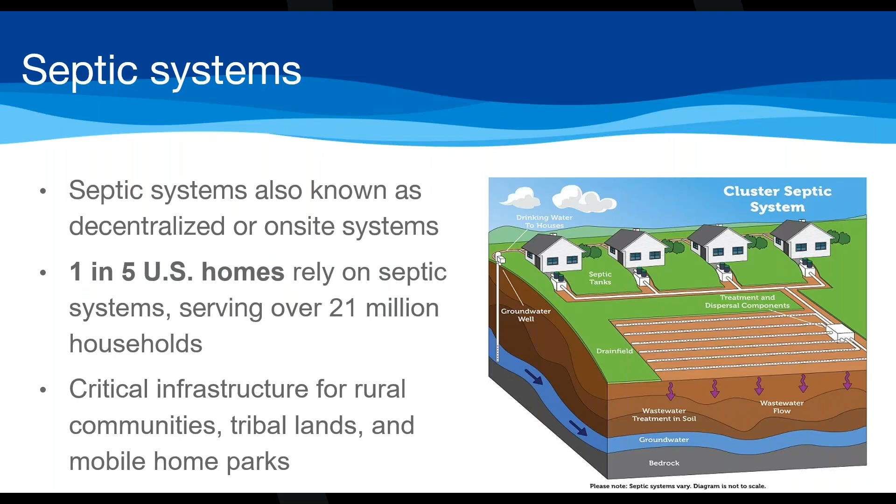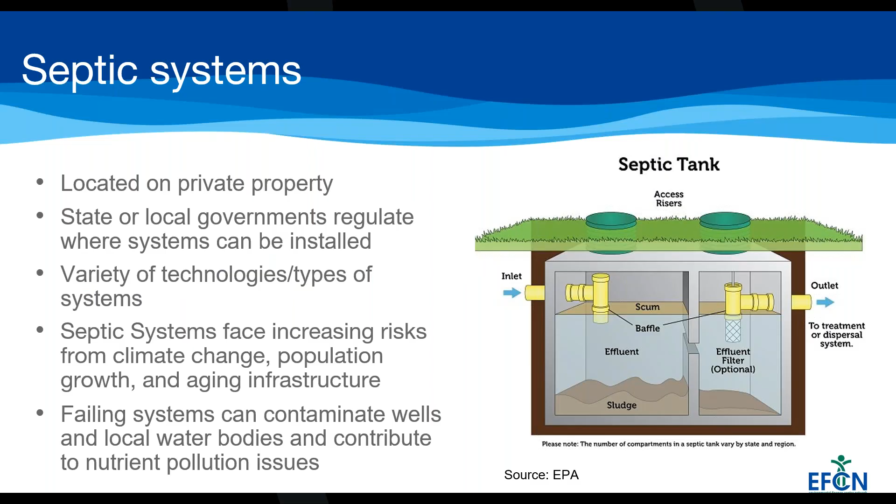I want to stress that septic systems are facing increasing risk from climate change, population growth, and aging infrastructure. And as with any wastewater treatment system, failing systems can contaminate wells, local water bodies, and contribute to nutrient pollution issues, which can impact our ecological environment.

So let's understand how a septic system works. Water from the household goes into a septic tank, using a two-stage process. The primary treatment takes place in the septic tank, where solids settle down and bacteria begin breaking down the waste. Then the water moves to the drain field, where secondary treatment takes place as soil microbes complete purification and effluent slowly percolates through it. When a septic system is functioning properly, it can treat wastewater before it reaches the groundwater.

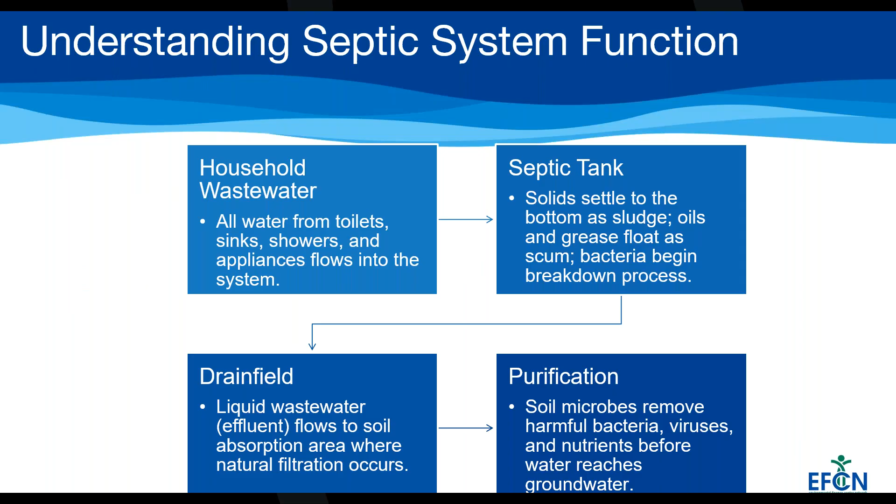Again, just a cross section of how the water goes from house to the drain field. It goes into the septic tank where the solids settle, and then it is dispersed into the drain field where the soil, usually at a depth of 2 to 4 feet, is required for the septic system to work properly. Soil is a natural biological and chemical filter with aerobic properties which can treat this wastewater, and it is essential for treating this wastewater before it goes into the groundwater.

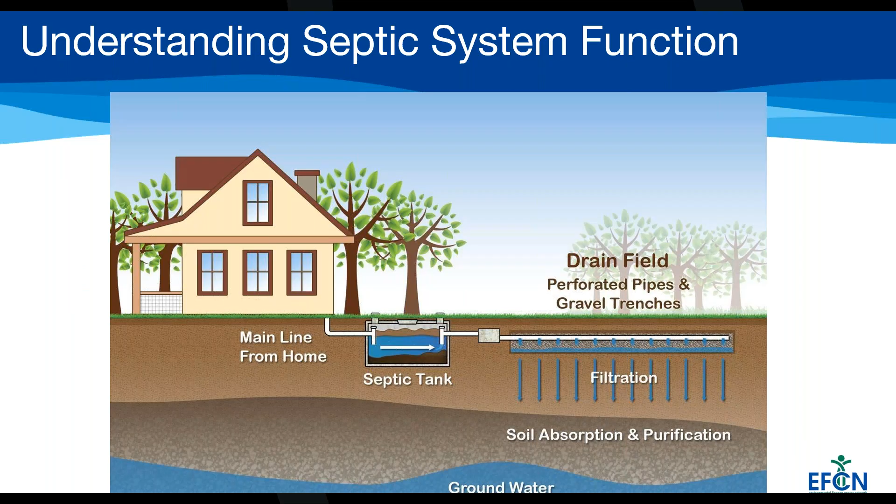For that, we need unsaturated soil, which is essential for wastewater treatment. If soil becomes saturated for some reason, it can reduce its treatment potential and can contaminate drinking water.

So what are some common septic system configurations? The most common are single family systems, which serve individual homes. These are conventional gravity systems with a tank and a drain field, or aerobic units, and sometimes they are used as mound systems where there are high water tables.

Then there are community systems, which is shared infrastructure for multiple homes. It works in a similar mechanism, but sometimes it is beneficial for economies of scale for maintenance, because the cost is shared among different households.

And then there are mobile home parks, which are mostly in lower income neighborhoods and communities, and they also utilize these systems. They have higher maintenance requirements because they have more water load, and these are often aging infrastructure with limited oversight and low cost to pay for it.

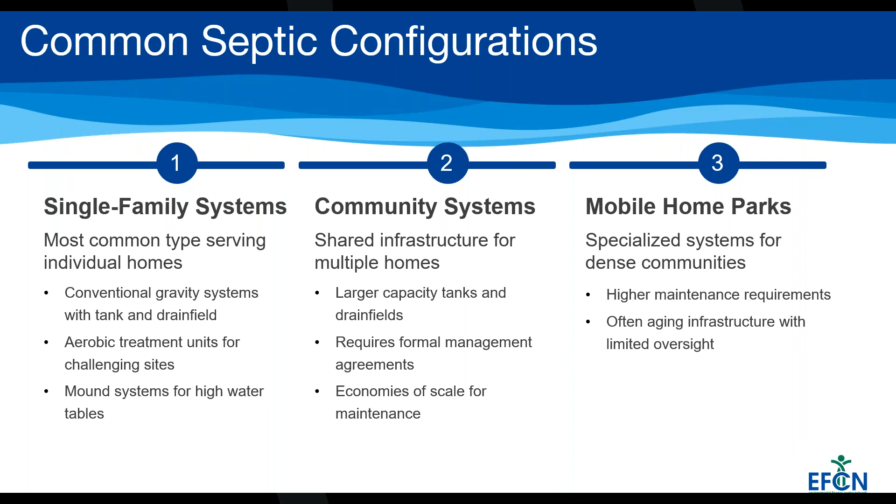Some essential maintenance requirements for septic systems: you need regular inspections, recommended every 3 years. Look for signs of failure like wet spots and odor, and monitor your sludge and scum layers in your septic tank. Pumping is really important too.

Every 3 to 5 years, depending on household size and load, you have to have your septic tank pumped, keep a schedule, and keep records of it. You also need certain daily practices to avoid flushing non-biodegradable items and keep chemicals out of the drains.

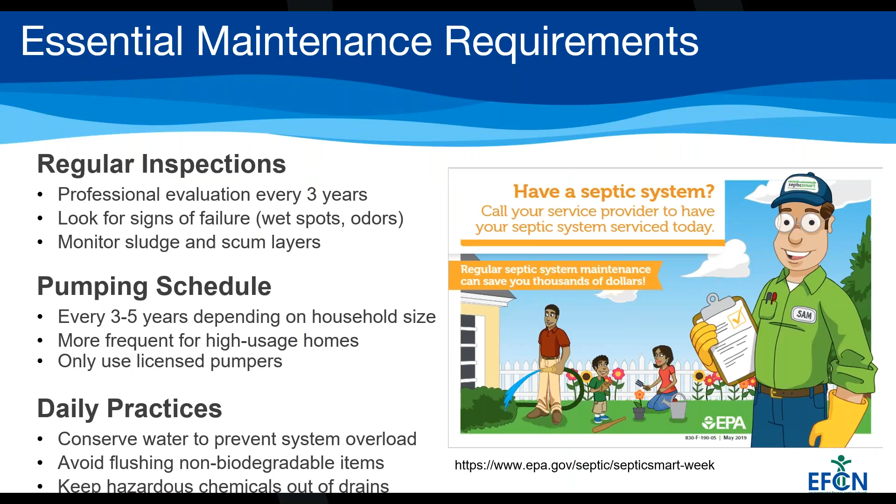This is an image from Septic Smart Week, which EPA is celebrating from 15 to 19 September 2025. There are a lot of resources on this website from EPA which you can share within your communities or read about, like not parking on a drain field or keeping trees away from septic tanks, because roots might clog your septic tank. Treat your water properly before it meets the groundwater, and keep your drinking water wells clean.

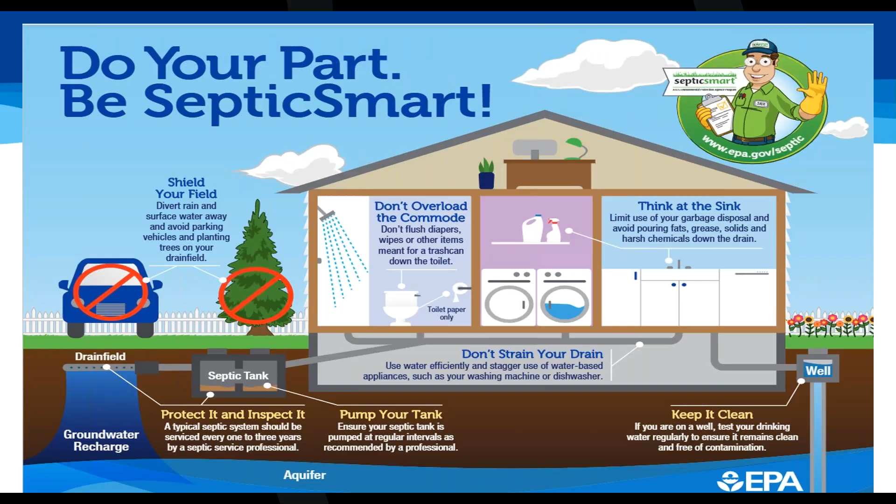Some challenges I want to mention about mobile home parks: they have higher density pressures. Mobile home parks typically place more homes per acre, so they have higher density and higher water load. Sometimes there is divided responsibility and confusion about who is going to maintain the wastewater or septic systems—either the park owner or the community itself—and they also face limited resources since they are in low income neighborhoods.

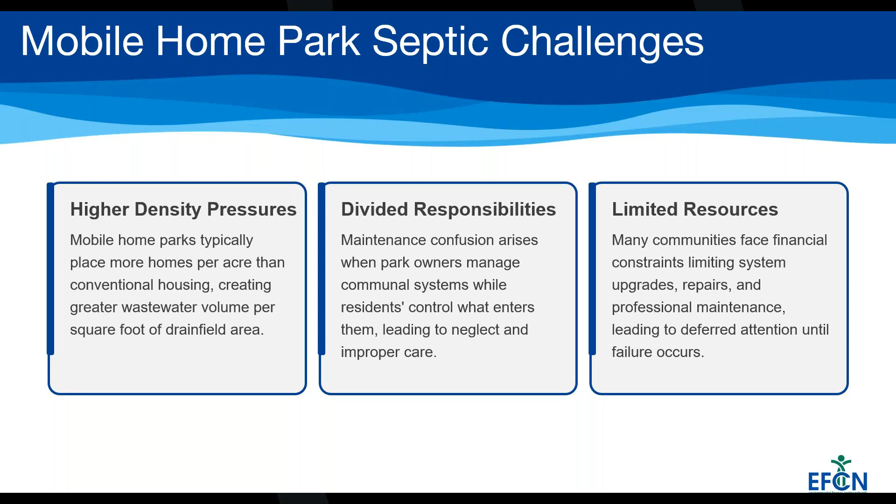Some common failure mechanisms they have: reduced retention times, which lead to insufficient treatment capacity, and hydraulic overload, for example in mobile home parks where a lot of households share the same system. Sometimes chemical disruptions can occur, and the drain field can clog. These could be due to human factors like poor maintenance and parking on septic fields.

Sometimes there are structural issues where the system is really old and not able to treat water well. And then sometimes there are geological factors—we'll talk about that in detail. It could be due to climate or seasonal variability in the water table, and low soil permeability, which can increase these issues as well.

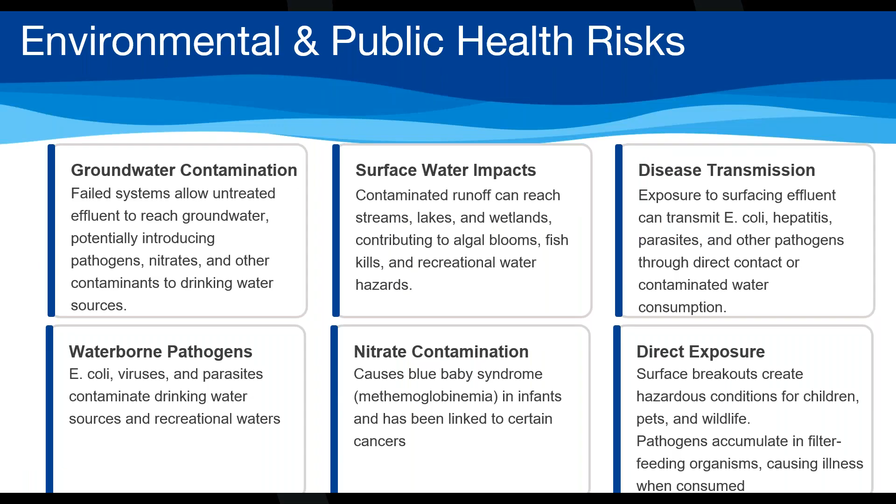Groundwater contamination can also lead to waterborne pathogens. It can also impact your surface water if it directly runs off into it, increasing nitrate contamination and disease transmission. A lot of research has been done around communities which use septic systems, and E. coli has been found in those communities' drinking water resources. Direct exposure is hazardous as well because of these breakouts.

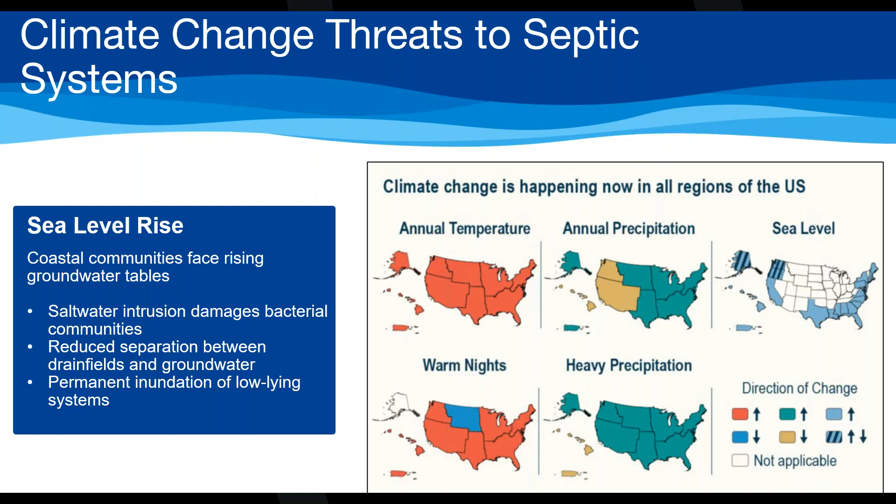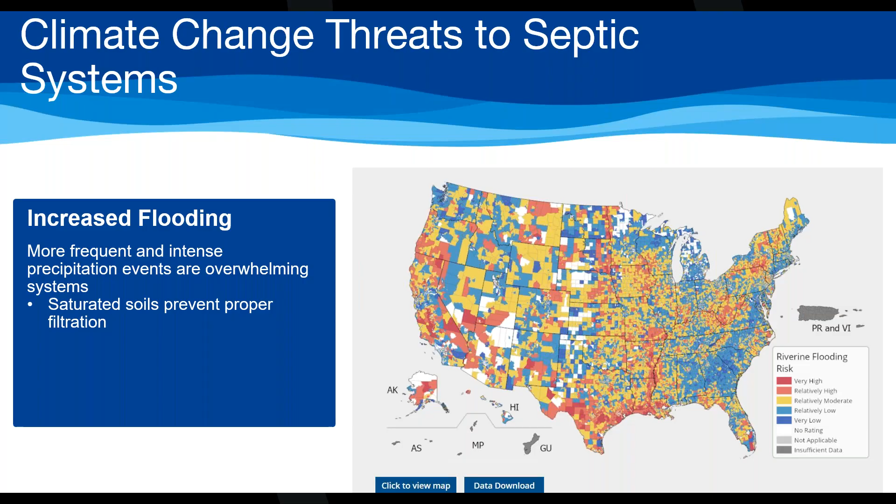Increased precipitation and sea level rise lead to rising water tables, elevating groundwater levels and reducing the essential unsaturated soil. The soil gets saturated, reducing its treatment capacity. Extended droughts can also shrink the soil and create cracks, allowing preferential flow that lets effluent bypass the treatment zone. Unsaturated soil is really important because it acts as a biochemical filter containing cells that treat the water. As vertical separation between groundwater and the drain field decreases, it reduces the capacity to treat the water as well.

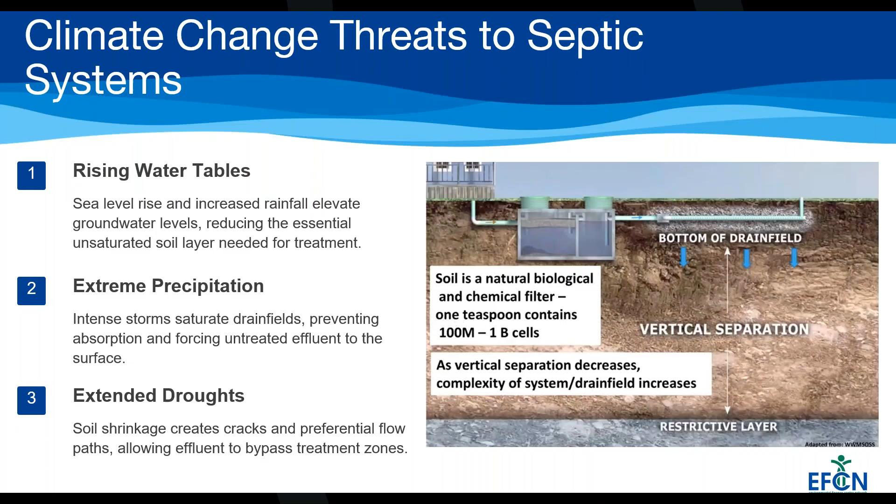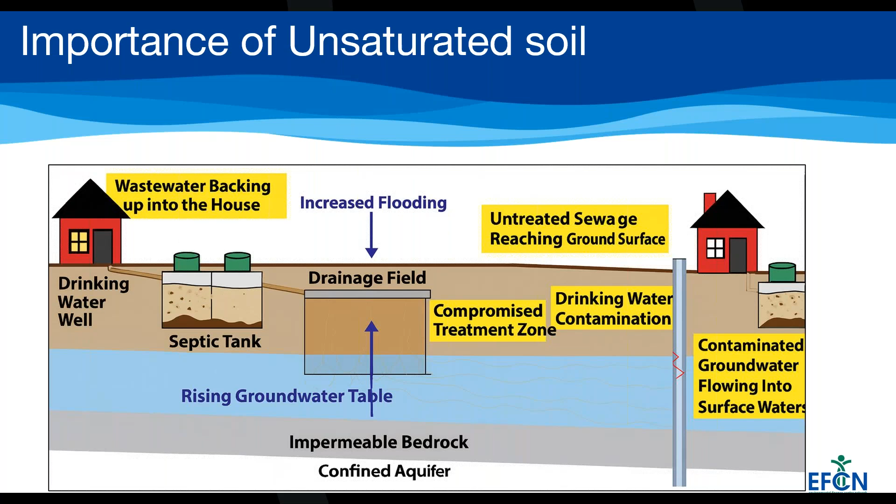Just a graphic to show how it is working and how it is impacting the septic system capacity. Water goes to the septic tank. We all know that if there's increased flooding, the soil gets saturated, and there's also an impact of rising groundwater table if the community is in a sea level rise zone. So it can reduce treatment capacity significantly, and system saturation can lead to permanent failure.

A lot of areas like Chesapeake Bay, a critical area which is considered as 1,000 feet of tidal waters, is a critical zone. Also, areas on the lakes and around the rivers are also considered critical areas. These areas face the same issues, which is increase in tidal flooding or flooding, which can increase the soil saturation and reduce the treatment capacity of the system.

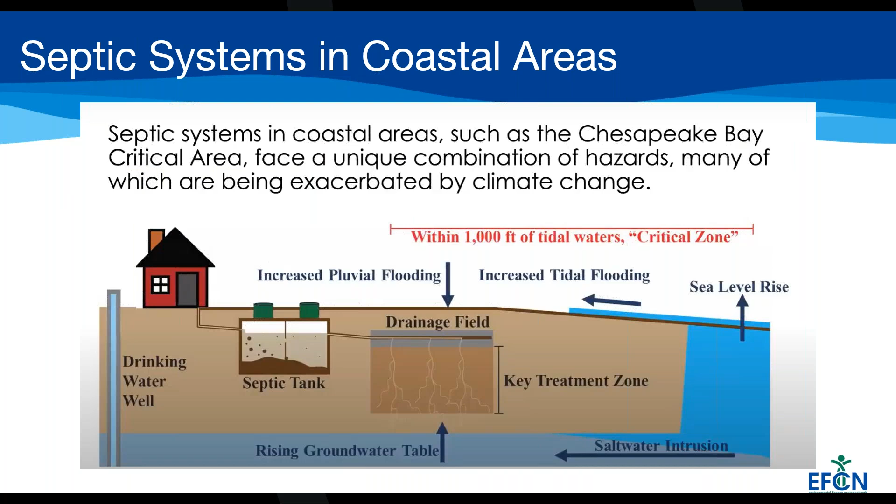We usually think that 3 to 5 feet, or 2 to 5 feet, of depth is enough for the drain field to treat the wastewater coming in from the septic tank. But a lot of counties, a lot of communities, local governments around the US are restricting it so that it should be more than 3 feet, because of the sea level rise that is happening around, or increasing water tables happening around the US.

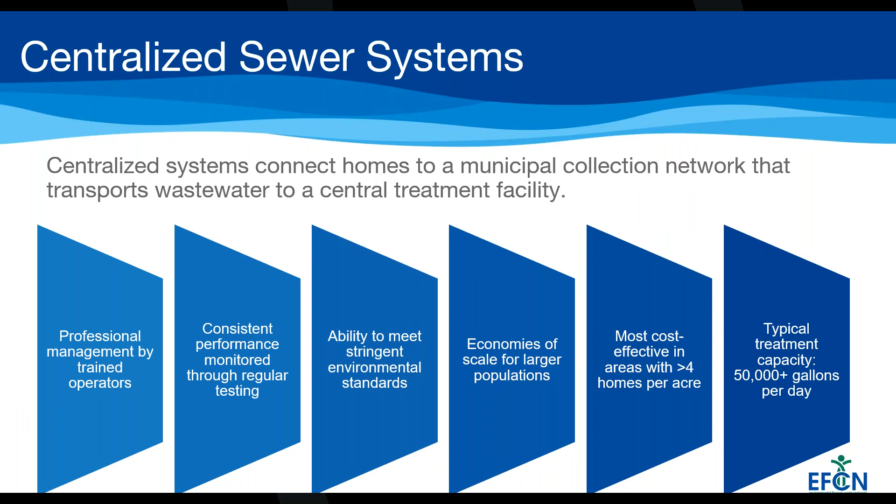These are modern treatment plants which can achieve removal rates of almost 95% for BOD and pathogens, with advanced nutrient removal capabilities as well.

Some advantages of these centralized sewer systems: they eliminate individual maintenance responsibilities, improve environmental protection with advanced treatment, and can probably increase property values by 5 to 10% on average. They provide long-term stability through shared infrastructure and support future community growth and development. Of course, it should not be in a flood-prone or sea level rise zone.

Some challenges: it is usually capital intensive, requiring a higher cost per connection, which can run from $3,000 to $10,000 or sometimes upwards of that.

There's usually ongoing monthly fees associated with each household as well, which can be from $30 to sometimes $100 if it's a small community with a low number of customers.

It requires extensive construction, which can last from 6 to 18 months, and requires operation and management municipal capacity. Installation cost can increase with distance from the existing infrastructure, so it depends on how far away you are from an existing system. Otherwise, you can think about the alternatives that we shared.

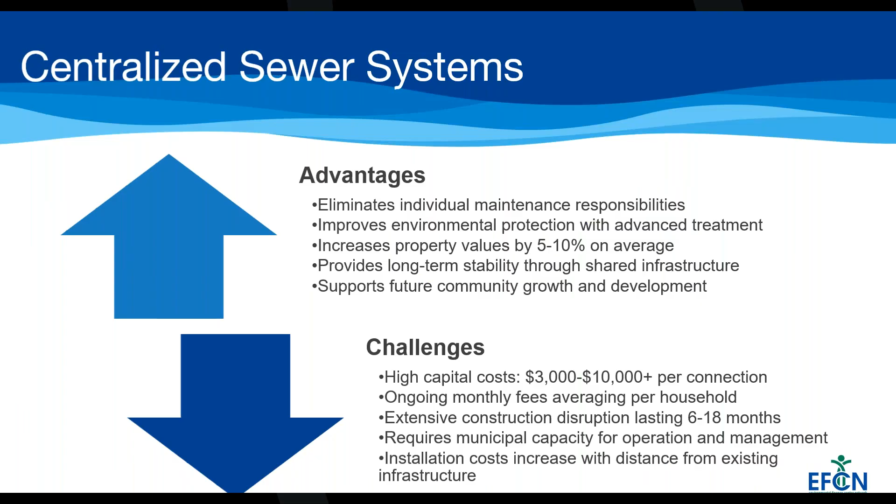So what are some issues that regulators, communities, or counties face in septic to sewer transition? These are around funding application hurdles, requiring extensive preliminary design for NEPA compliance, and land value and easement costs can increase the project expenses.

Sometimes there is underground infrastructure and we have to coordinate with the utilities, which can complicate the installation and increase the timelines. Sometimes there are also material procurement issues, and restrictions on roads and right of way can hinder easement acquisition, which can again lead to increased timelines for construction.

Sometimes residents are reluctant to grant easement, which can lead to redesign of the project alignment where the pipeline is going to go through, and which can increase the project cost as well.

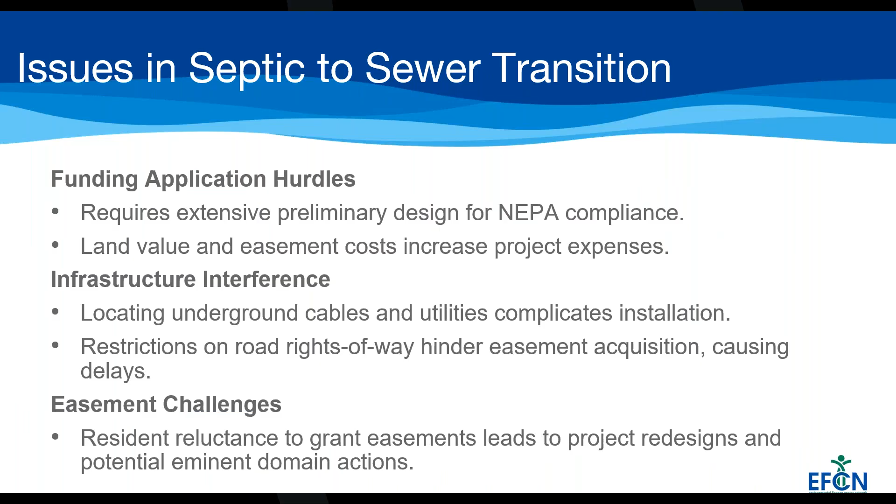Now let's talk about upgrading existing systems. We talked about connecting to the sewer, but if it's not feasible to connect to an existing sewer or nearby treatment facility, you can upgrade your on-site system, which is confined usually to a single property. So you have to bear the cost of that, but it can still be vulnerable to climate impact, so you have to take care of a lot of those factors.

The soil ultimately provides the treatment capacity, so it is still vulnerable to sea level rise. If you upgrade it, it might be less vulnerable than when it was installed, but it'll still be vulnerable to sea level rise as well.

Then there is the option to build an alternative sewer to cluster treatment system. Instead of having a centralized treatment system at the end, you would have essentially what would be a large septic tank for multiple properties that is offsite from each individual one. EPA usually calls it a cluster septic system. This still provides some of the cost savings, and it doesn't require a treatment facility for operators.

But because it is still in many ways a septic tank, it is vulnerable to sea level rise and depends on the soil for the treatment capacity. It will provide you overall cost savings, but you might be paying as an existing user, or sometimes there are government programs to offset the cost.

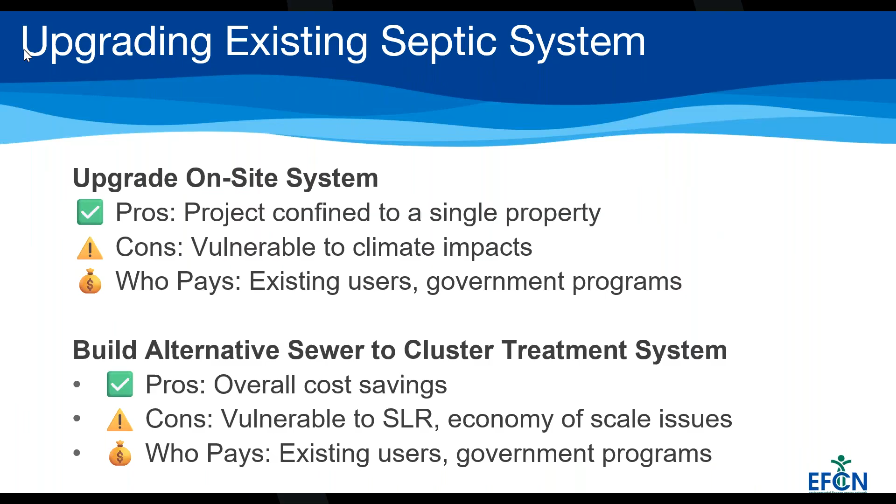This is an example of a cluster system. It usually serves multiple properties, typically 2 to 100 homes. We can see in the image that all the treatment from those 4 homes goes into a single component, and then it is dispersed into a larger drain field.

It provides better treatment than individual septic systems, and you can also lower the cost compared to centralized sewer systems, also lowering your maintenance cost. A lot of times its capacity runs from 1,500 to 30,000 gallons, and it is usually ideal for small villages and lakefront communities.

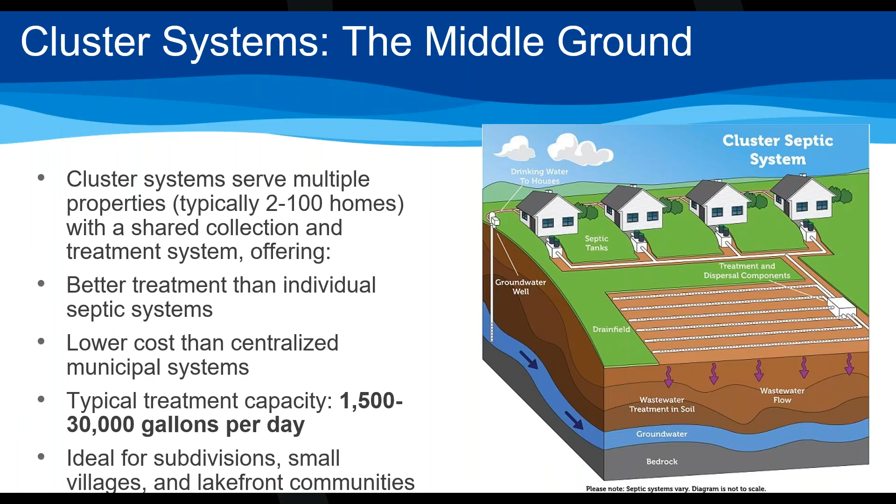Some benefits: lower per home cost than a centralized system, better treatment than individual septic systems, shared maintenance cost across multiple properties, which is a really huge benefit, and flexibility in siting and design to match local conditions.

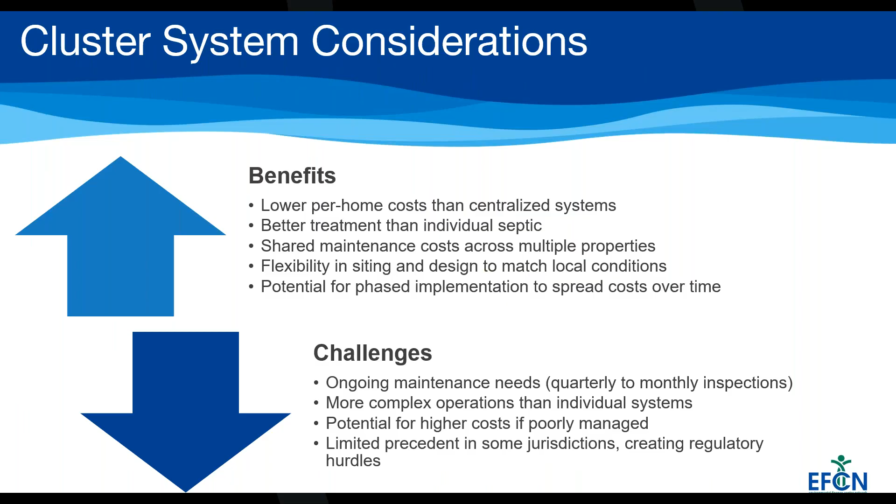There are some challenges as well, because it has increased water load. It's going to have ongoing maintenance needs, which depend on quarterly to monthly inspections. It might have more complex operation than individual systems, and then potential higher cost if it is not managed properly, or if the duties are not assigned properly, and it depends on some jurisdictions as well.

Another solution is raised mound and elevated systems. These provide additional elevation, protect the drain field from recurrent flooding events, and provide more soil through which effluent can travel. They also allow pre-treatment in individual septic tanks before pumping effluent to a community treatment system. They can lower collection costs with small diameter pipes, and are the most common approach for retrofitting existing developments. They are installed completely above ground and are therefore protected from sea level rise.

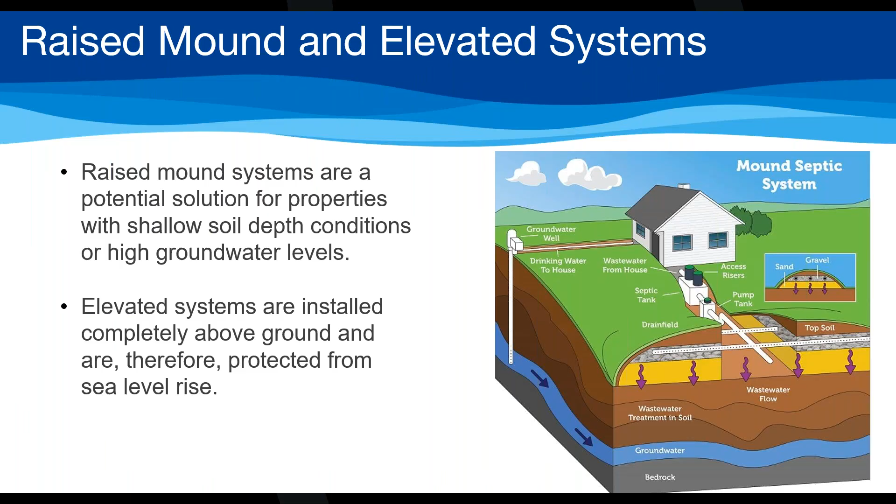Again, the recirculating sand filter system requires a pumping tank which trickles water through the sand filter septic system. It has a layer of sand and gravel, and water needs to be pumped to the raised mound bed to trickle down. Effluent is pumped through the pipes. These systems offer high nutrient removal, but are more expensive than conventional septic systems.

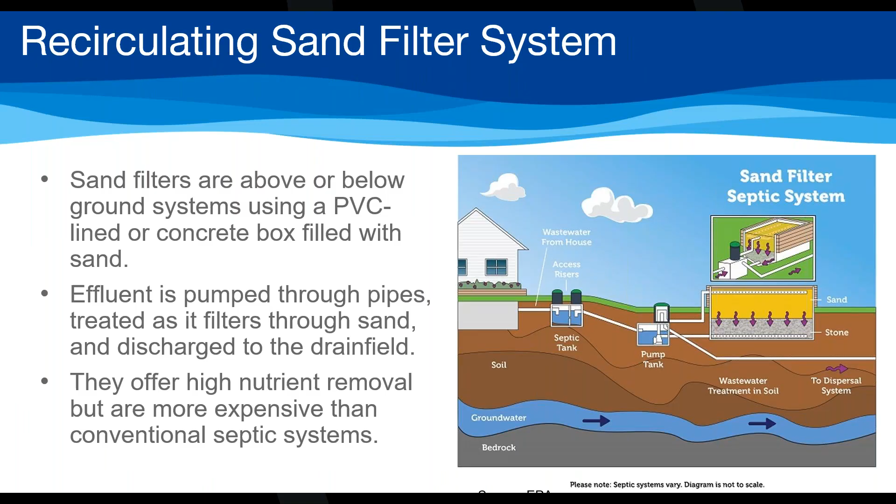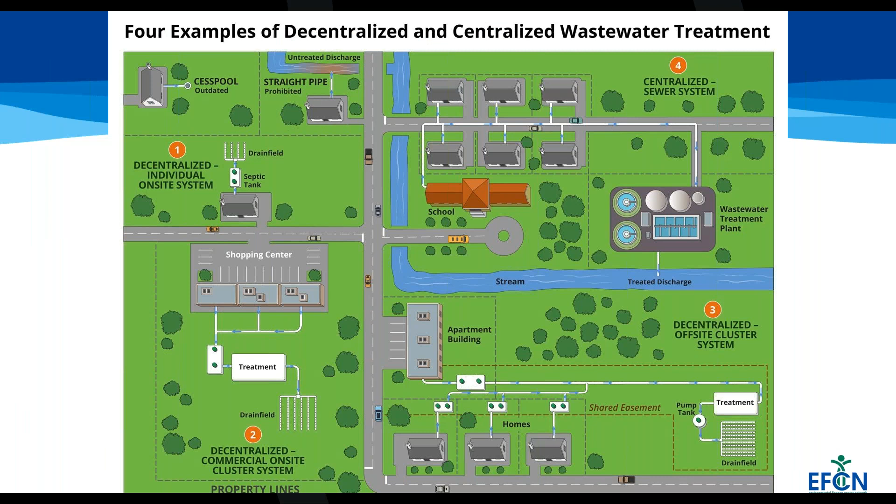It is attached to a shopping center with multiple shops, and water comes in from those different facilities into a septic tank, then is treated and dispersed onto a drain field. On the lower right side is a decentralized offsite cluster system, with water coming in from multiple homes and apartment buildings into a treatment unit and then draining out into the field. The basic centralized sewer system carries water from all these homes, apartments, and schools to a centralized sewer facility, which is usually mechanically operated, then treated and discharged.

So how do you plan for a successful transition? You have to do some technical assessment, a feasibility study and engineering analysis to identify the most appropriate solution for specific site conditions, because sometimes there might not be existing sewer, or sometimes that might be the best option available if it runs close to your community.

Community engagement is a really big and important part of that. You have to build trust with your residents and stakeholders, and you will need their support. It is always essential and best to be transparent in communication about the benefits, timelines, and financial and cost implications of that new transfer mechanism or facility.

Then there's financing strategies - how are you going to pay for that? Do you have a blended funding approach utilizing grants, low interest loans, and resident contributions when appropriate? And then long-term operation and maintenance planning - who is going to take care of these new systems, with clear responsibility assignments and revenue mechanisms, because you can't do maintenance if you don't have any revenue mechanisms in place.

One thing I'd like to stress is effective community engagement. It is essential to use plain language, address concerns about cost and disruption directly, and emphasize the benefits to health, property values, and quality of life.

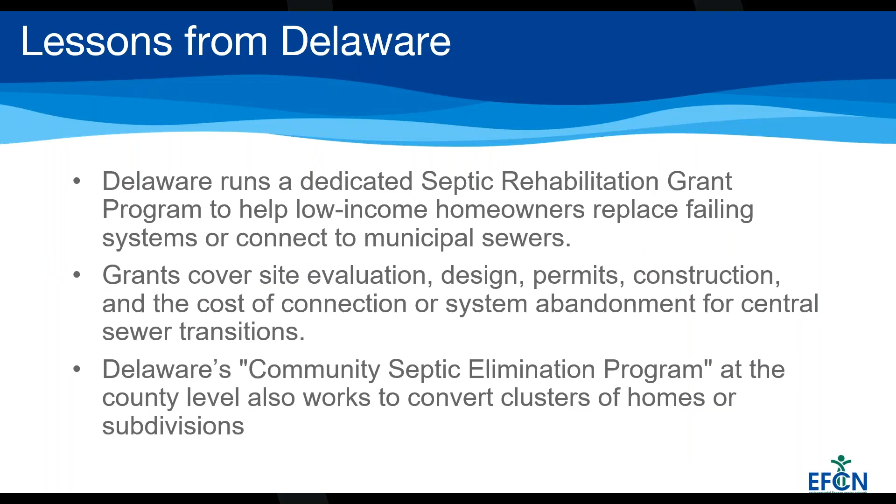I just want to show their approach on how these things go through. The town passes a resolution for county sewer system review. The county presents options for the town or ordinance to form a sewer district. Then it gets approved, and county engineering presents those requests to county council. Then it goes to the next steps of engineering development drawings and environmental documents. And then there is a funding application process through the state fund, and the county receives and accepts a binding commitment letter for the loan from that community.

Some examples from Florida - again, state-run programs along with some counties which have sensitive marine environments, so they have a targeted approach to protect that. They include hybrid systems, both gravity and low-pressure collection technologies. They also integrate funding from the state revolving fund and county taxes, which is key for affordability in those areas. And they clearly communicate with their communities for stakeholder buy-in and regulatory timetables, which ensures timely completion.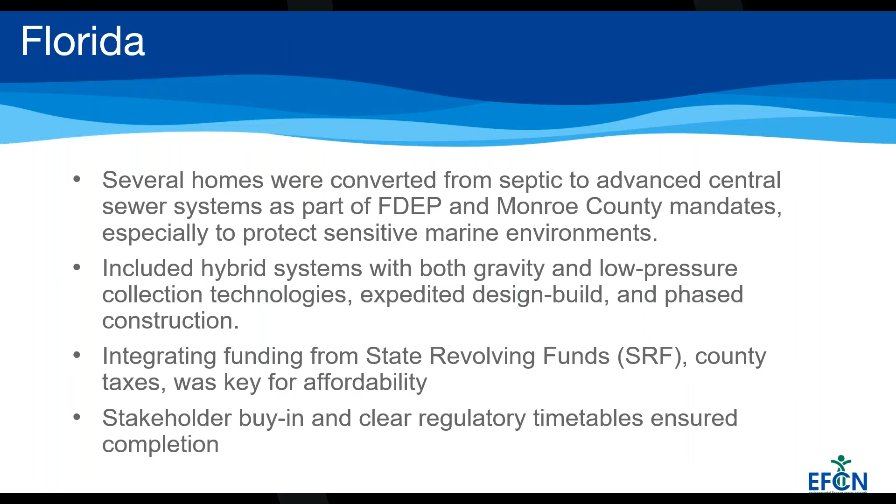California - there are multiple neighborhoods which have transitioned from individual septic systems to public sewer. Research has found that having existing or new development of sewer systems can lead to increased property values as well as increased new development. In California, each area project paid the construction and connection cost, making conversion no-cost for many homeowners, which meant eligibility for everyone. They also did proactive outreach in those areas, ensuring there were no hindrances in implementation of those projects.

New York also has a targeted approach for priority water bodies, reimbursing up to half the cost, up to almost $10,000, for failing septic systems near lakes and rivers. They had an owner-driven application inspection process, which was tied to or capped at geographic locations with no direct income cap. They targeted those scarce funds to address water quality effects efficiently.

Some other state programs - a lot of SRF, state revolving loan fund, programs also incorporate some funding for community septic systems, which provides low-interest loans for septic repair, replacement, and sewer connection. The same approach is used in Massachusetts, where they provide funding for local septic management plans and provide financing to help homeowners upgrade their systems.